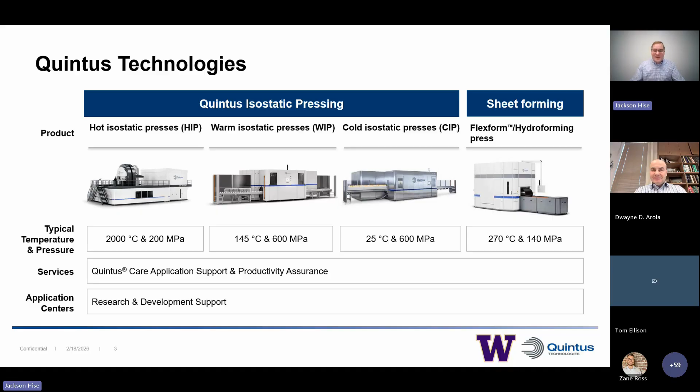Lastly, and I won't talk about it very much, but probably the most interesting thing here at Quintus is cold isostatic pressing, which is used in the food and beverage industry. Here we're taking bottled product, putting it within a cold isostatic press, pressurizing it, and actually disrupting the cell membrane so that bad bacteria cannot reproduce. I have no understanding of what really is going on here, except that if you ever see cold isostatic pressed product, it wasn't some nice hand press - it probably was industrial equipment.

With that background on Quintus, I want to point out Quintus has developed uniform rapid cooling and then uniform rapid quenching. As an equipment manufacturer, we're pushing the field along on what we can do within the HIP system. This leads to what I'll discuss at the end of my part of the presentation on high pressure heat treatment.

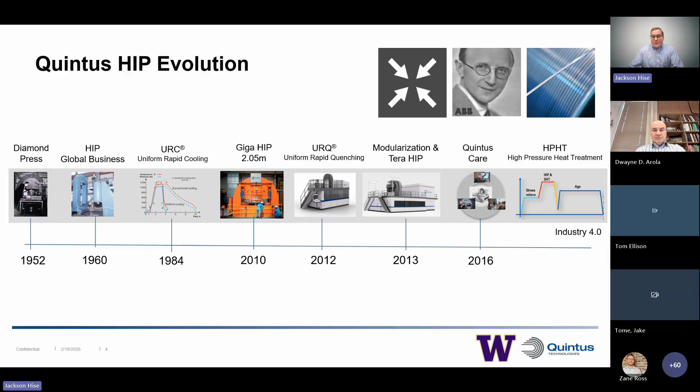So of the products Quintus builds, we have first our R&D and small production units, but this scales to our mid-sized and large production units. The value of this is that we can reproduce anything in a small system that we can do in a large system. Specifically, if you're interested in hipping material, what may fit into a small system can also undergo the same performance parameters in our medium and large size units. And so if you want to hip with the build plate, say, Quintus has products that can accommodate that.

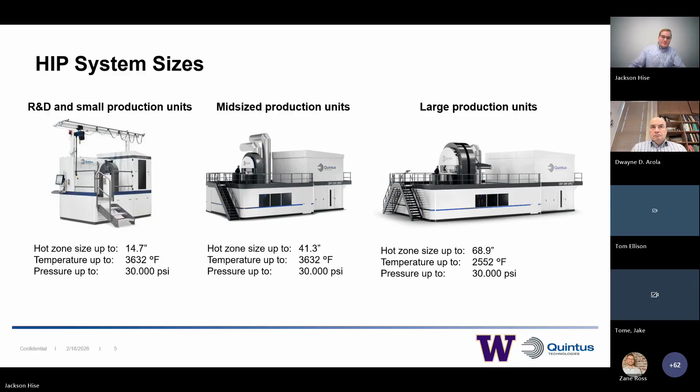Looking quickly at the fundamentals of HIP, if you're unfamiliar, hipping revolves around applying temperature and pressure. Our temperatures go up to 2000 degrees Celsius, but this is really material dependent - we're looking at only about 80% of the material solidus temperature. We're also applying pressures up to 200 MPa, and the first and foremost use of HIP is to densify solids. We see that in traditional cast variants, hipping has been used on mission critical components for many decades.

Here we're applying our temperature and pressure around our part, and given that there's a gas-tight surface, we're able to decrease that porosity and fully densify our material.

We also see a growing interest in the consolidation of powder, where we create a can, a near net shaped can to the component we want to create. Then we fill it with powder, pulling a vacuum on this and then placing it within the hip. We can get a single uniform piece of material.

This is significant because it rivals traditional forging, except that the cycle time, the process time, the manufacturing time is significantly decreased compared to those forging operations.

If we want to think about just the quick material science, I know Dwayne will get into more of this. Densification mechanisms first go through mechanical deformation, where we have the defects collapsing because of this applied pressure. And then over time, over our hold, we have creep and diffusion, where we're seeing that these collapsed defects are bonding.

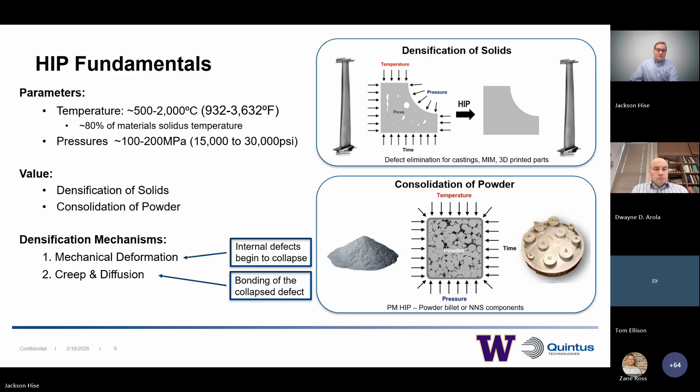I discussed the densification of products. I can discuss the consolidation of powder, but there's other operations that can be formed in the hip, such as diffusion bonding, where we're joining two dissimilar materials together in solid state.

We also have this high pressure heat treatment, which is a development that's only capable with the modern hip system that I will be discussing later, but essentially is doing the heat treatment cycles within the hip after applying this high pressure parameter.

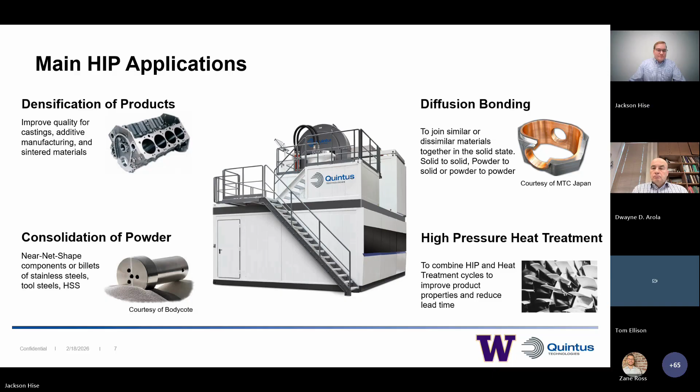So if we want to take a step back and just look at some broad overall advantages of hip material, first and foremost, hipping the material eliminates internal defects. This elimination of stress concentration and crack initiation points lead to superior mechanical property.

If we want to take an extreme example, we can see this machined artificial pore here. Here we machined an 1-inch diameter pore into the component, then welded these two parts together. After we hip, we see that we fully resolved and healed this hole or this pore within the material.

The only true challenge here would just be getting that gas-tight structure in which the applied pressure medium cannot penetrate the material and allow for the pore not to be healed.

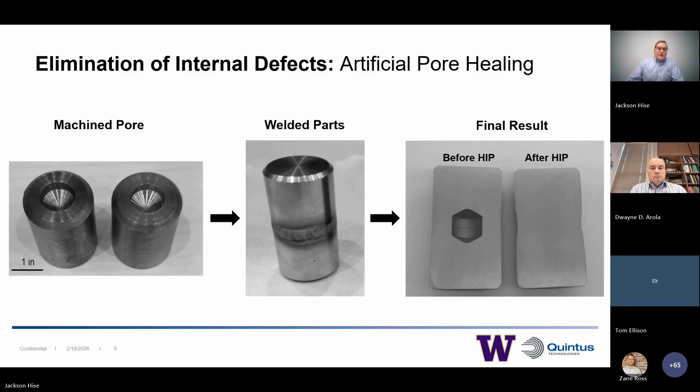If we're looking at additive manufacturing variants, we can see that powder bed fusion, DED, and binder jet all have a reduce or elimination of internal defects after hipping. And this really provides value we'll see here in a second on what it means for printing parameters if we're going to also hip.

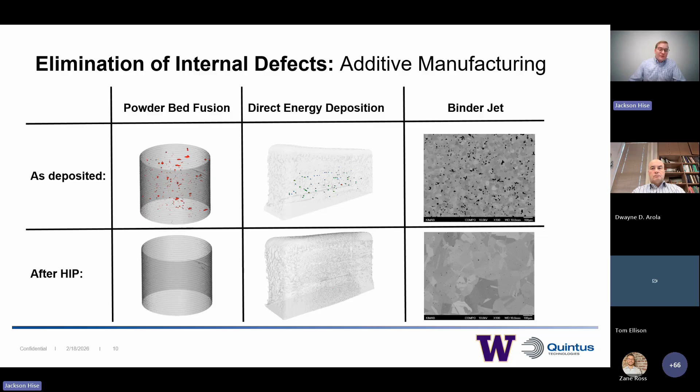So I spoke to the elimination of internal defects, but this really produces superior material properties. We see that hipped materials have dramatically increased fatigue life, up to 100 times, increased ductility and fracture toughness, and better creep properties. If we're thinking of something like GRX 810, a recent ODS alloy that came out of NASA, we see that the hipped version has a creep value 2 times as large as the printed use case.

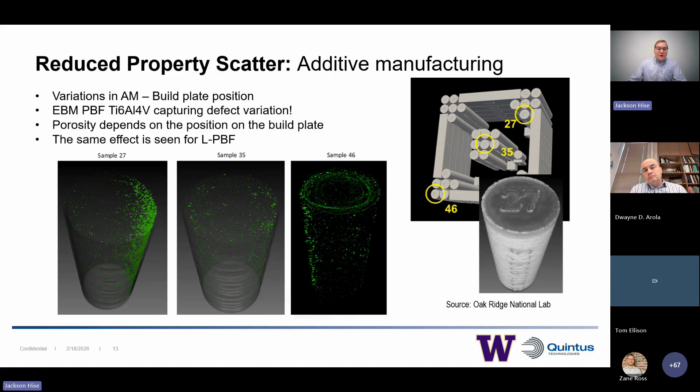We also can think of reduced property scatter. Here we know that there's natural variation of defects between components being built. One example in the additive world is even among the single build plate, variations across the build plate produce different defect locations. So here we can see sample 27, sample 35, and 46, and where these defects are scattered throughout the part. By hipping this, we can resolve these internal defects, providing not only a fully dense sample, but also predictable variation between each and every component.

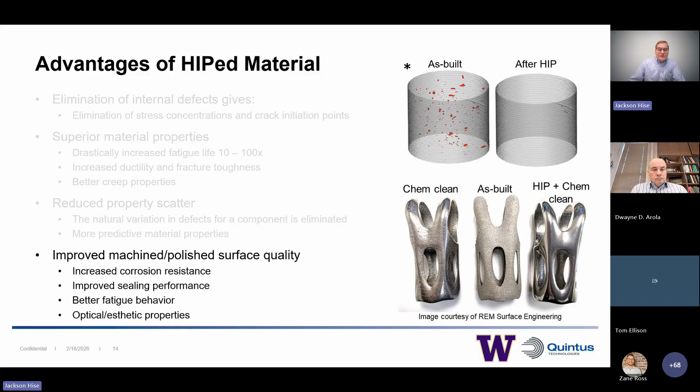Lastly, improved machine polished and surface quality. This, of course, increases corrosion resistance, improves sealing performance, but really goes down to this internal subsurface porosity.

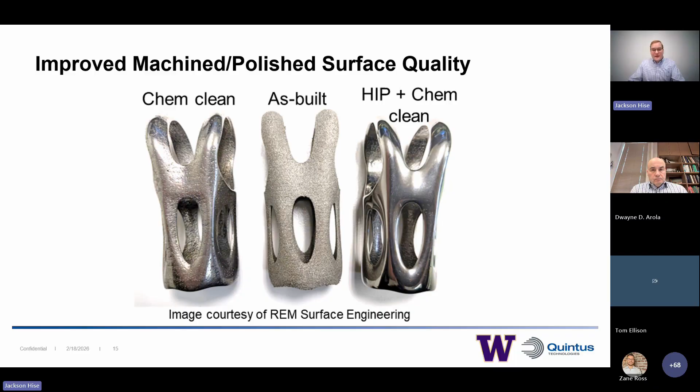Here we have a printed part. If we were just going to chemically clean it, we would see that there's subsurface porosity that's exposed by pulling away material. But if we hip and resolve this porosity, then we can chem clean and get a nice uniform surface, which therefore increases things like corrosion resistance.

Now to discuss modern hip equipment and really some capabilities within the machines that can produce interesting value to a user. First, Quintus hips use a wire-wound pressure vessel. This is where we have a small vessel frame and then wind it with miles and miles of material or of wire. By doing this, we're able to integrate controlled cooling channels, leading to controlled and steered cooling rates.

The alternative to doing this, which Quintus does not do, is a monoblock system which relies on natural cooling to cool down the system in the furnace and contained.

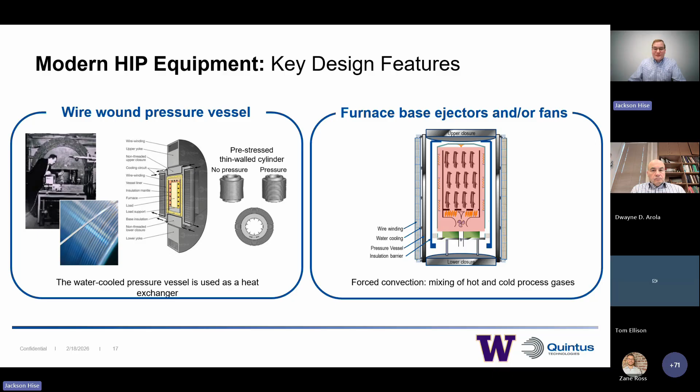We also at Quintus here have forced convection, which uses fans and ejectors at the base of the vessel to circulate gas flow within the system. This leads to the mixing of hot and cold gases, leading to temperature uniformity and temperature control.

Really, the value of these two equipment features is first forced convection heating. Here we have improved temperature uniformity, reduced process cycle time, and lower energy consumption. This is because we can steer the coolant or the heating of the system to the desired rate, hold it, and then cool. And of course, if we can do this quicker and more efficiently, there'll be more cycles we can implement in a given time.

Quintus also has uniform rapid cooling and uniform rapid quenching capabilities. The quenching technique used within a Quintus system has a cooling rate faster than that of an oil quench, slower than that of water quench. So here we can quench and cool the system significantly quicker than conventional cooling, which allows for that reduced process cycle time, but also the opportunity to use high pressure heat treatment that I will discuss here in a minute.

Finally, if anyone has ever dealt with hipping Ti-6-4, you know that the material is prone to oxidation and alpha casing when it undergoes the HIP cycle. Quintus has developed something called Quintus Purus, which is a technique used in the HIP cycle to mitigate and remove that initial moisture presence so it cannot react with the parts. We're seeing the use of this in the medical industry, where the materials coming out of the system are already optically viable for use.

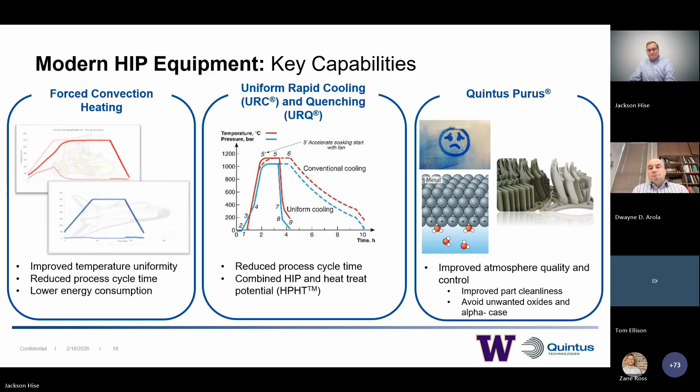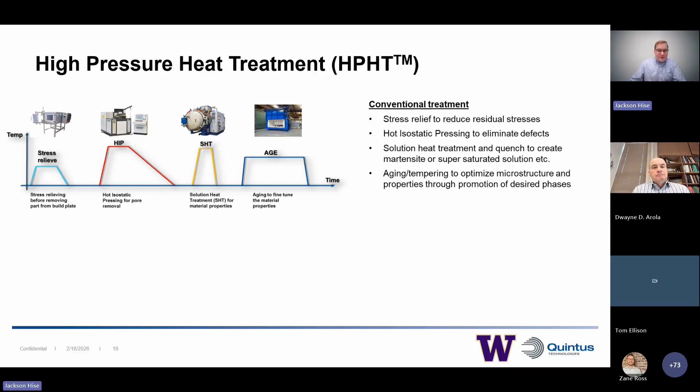I've discussed and mentioned it a couple times, but just to touch base one more time, high pressure heat treatment is really of interest here in these modern Quintus HIP systems. We know that traditional conventional heat treating methods first do a stress relief, then you HIP, then you solution heat treat, and then you age. But given that Quintus HIP is capable of controlled cooling and that uniform rapid quenching, we can do all of this heat treatment within one equipment, one piece of machinery, which is a hot isostatic press.

So here we have our stress relief and HIP, then combined with the solution heat treatment that comes from the quenching capability, as well as an age. This, of course, would reduce the number of process steps, reduce total cycle time, improve process and quality control. And one thing to note is this is being commercially applied today, specifically for aluminum alloys that we'll see here in a minute.

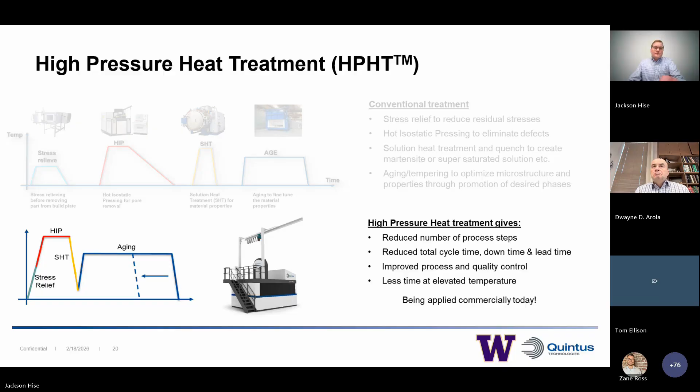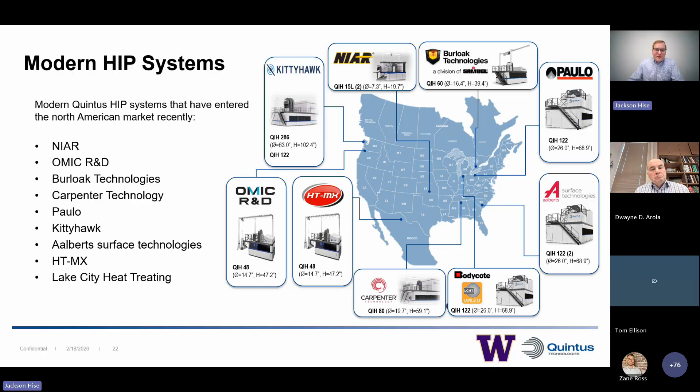So I discussed these modern HIP systems, but want to point out that it's not only theory, but there's multiple places throughout the US that are taking advantage of modern HIP capabilities. Not only are the companies listed here using these modern HIPs, but many other companies that aren't mentioned are taking advantage of the value that comes with a new and optimized system.

I wanted to quickly point out how Quintus has a HIP application center. I'm sure if you're here for Chad, you would recognize Chad in the picture, but Chad and I work within an application center in Columbus, Ohio, whose primary goal is to support the development of HIP processes.

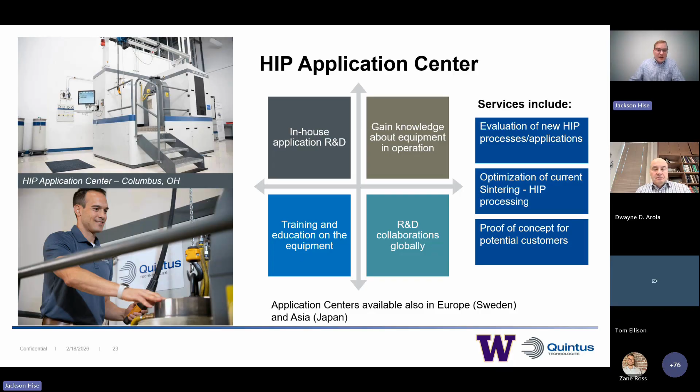So here we evaluate new HIP parameters, we optimize current sintering and HIP processing, and do proof of concept with potential customers. A lot of the work Chad and I put in is in collaboration with OEMs, universities, and national labs, one of which a university collaboration here at Dwayne is going to be highlighted, trying to develop and advance our HIP capabilities.

So just a couple of trends that I'm going to briefly talk to in the additive world before I hand it over to Dwayne to give a case study on this. One trend is printing faster using HIP.

I mentioned in an earlier slide that we require a gas-tight structure to then HIP and densify. So as long as our outer layer of the material is fully dense, then the internal parts can be resolved. This would allow for a print faster using HIP technique where you have a lower energy density, or higher hatch spacing, in order to get the same part at the end. Because even if you have defects due to this higher printing rate, you still HIP and resolve them.

An extreme example of this is the shelled concept, where the structure was printed on 3 sides, fully dense, but then unprinted powder was left contained. Hipping, of course, shrunk the part, but it did create a fully dense structure of material.

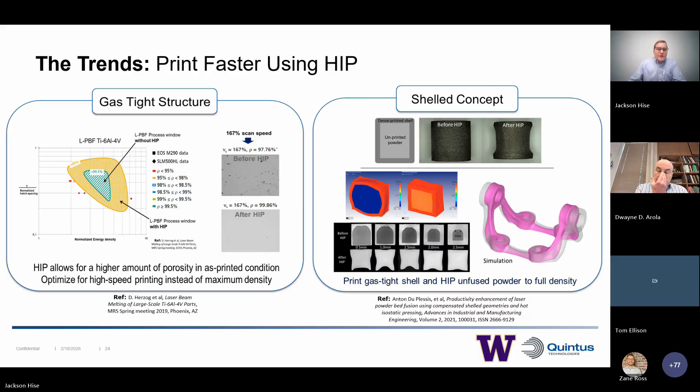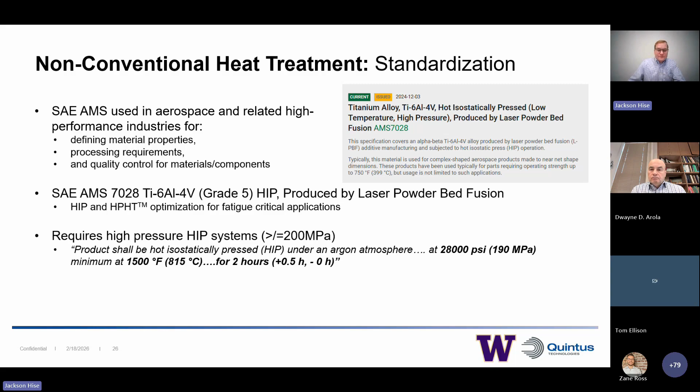I talked about something that's been standardized, such as Ti 6-4, but there's also plenty of work going on to optimize and develop these parameters for other materials. One example is with America Makes, ATI 1700, where we're working with Boeing and ATI RPM Innovations to accelerate the maturation of the nickel-based superalloy ATI 1700. Here at Quintus, we're taking part by utilizing advanced HIP manufacturing strategies in the form of high-pressure heat treatment to optimize the microstructure for our desired outcome.

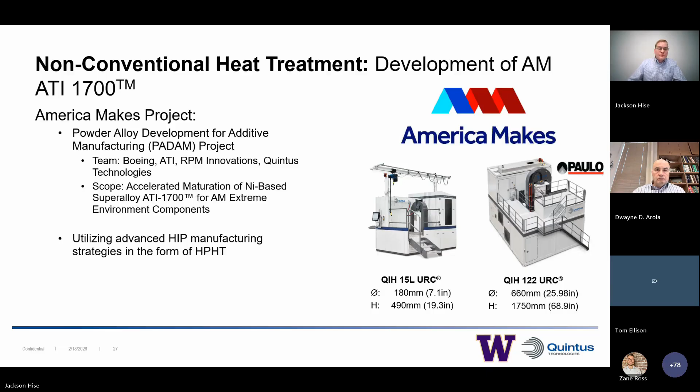One other thing I want to discuss is high-pressure heat treatment post-processing. We know that especially in AM aluminum alloys, there are too many post-process techniques - there's distortion during water quench, and hydrogen blistering that occurs. If we do all of this under a pressure medium, we're able to mitigate and avoid quite a few of these challenges. We can do the stress relief, HIP, and solution treatment all within a Quintus press and do the quench under an argon medium. This alternate approach avoids water quench distortion and also produces acceptable tensile properties.

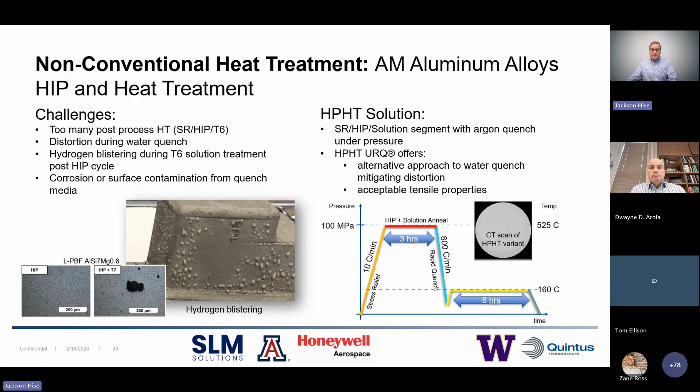As I mentioned earlier, this isn't only in development and being studied, but is actually being applied by some OEMs developing and using this aluminum alloy. So with that, I want to pass the torch off to Dwayne, who can give a more in-depth case study on what is going on with Ti 6-4.

All right, thank you, Jackson. That was great. Good morning, everybody, from the beautiful Pacific Northwest. Happy to be here and talk a little bit about the things we've been doing with respect to application of HIP, but our program is mostly focused on variability.

I want to begin by acknowledging that the case study I'm going to present is part of an ongoing effort supported by the FAA. This is supported through what's called the Advanced Materials in Transport Aircraft Structures Center of Excellence. I'd also like to point out that the work I'll present is the product of contributions from a large number of students engaged in our work.

Our program addresses the challenges faced by companies that have adopted laser powder bed fusion and seek its application for either stress-critical or safety-critical components. Of concern, of course, is the variability in properties exhibited by the metal, for example in a single component, based on where it's located in the build chamber and its orientation.

In the case where we need to produce more than one component, we've got to consider variations that arise from property variation through multiple builds, and understand the degree of that variation with regards to evolution in the machine's condition and process control. Then in the case where we need to recruit additional machines, we're interested in the degree of variation that occurs across those machines - either within our organization, or variability that occurs in machines across organizations or in disparate locations.

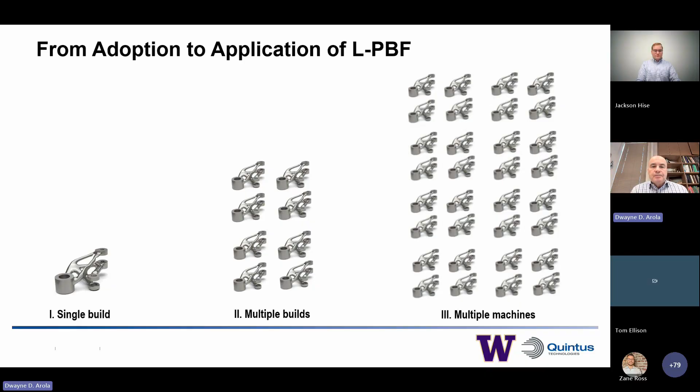So in order to address this, typically what we're doing is referring to categories of process variability. Here I'll refer to an intra-build process variability, which refers to the variation in metal quality and properties within the build volume of a single machine.

Next, we could talk about inter-build variability, which accounts for variation within a single machine but over multiple builds, which could occur from degradation of feedstock due to reuse, or evolution in the machine condition. The last category of variability refers to that which is between machines.

All three of these sources of variability we've got to be able to understand, and of course they all contribute to the reliability of the metal. So it's key for being able to quantify them and then understand root causes.

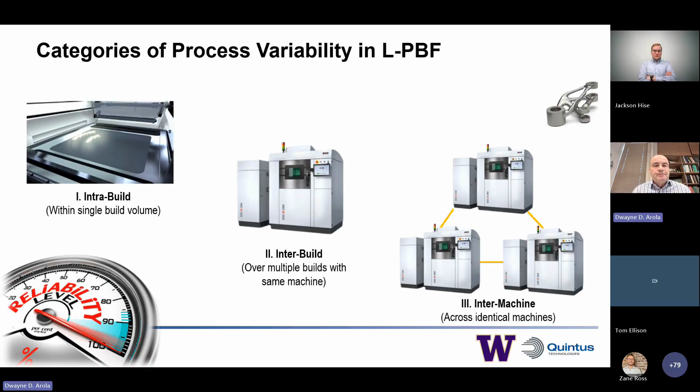So to make sure it's obvious, the objective of our program overall is to characterize that variability in the microstructure and mechanical properties of a grade 5 titanium produced by laser powder bed fusion. The purpose is, of course, to advance applications across aerospace with increased understanding.

The way we're doing this is by utilizing a round robin, led by the University of Washington. We've got a large number of contributing partners, primarily in the aerospace industry. They're conducting prints and are interested in making sure they understand the degree of variability that comes from their machine over the categories I just described.

In this case study, although our program is focused on static, cyclic, and dynamic properties, I'm going to be referring to the stress life or finite life fatigue properties that we've been able to examine.

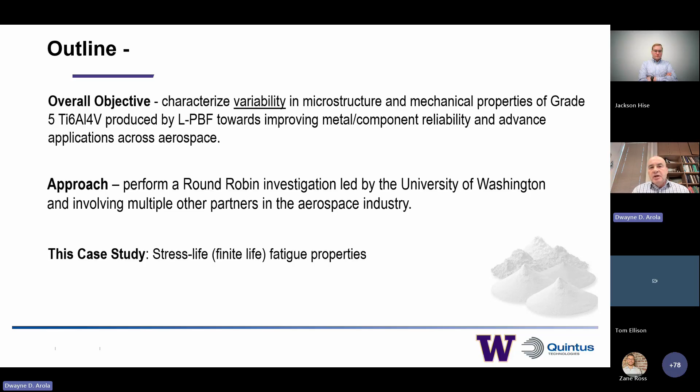And of course what I'll be doing is highlighting what we see with regards to the inclusion of a HIP treatment. So to protect the identity of the participants, I'm going to refer to the round robin partners in a blind format.

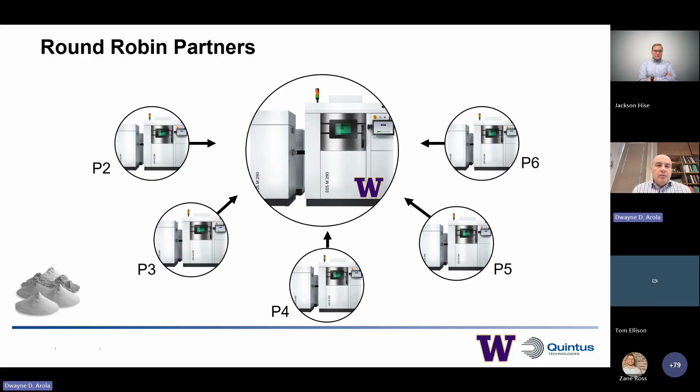What they're doing is providing metal to us with regards to a condition that we've been outlining, which I'm going to refer to in a little bit.

So the program structure involves all the partners engaged in this effort operating an EOS M290. They're all utilizing a single lot of powder, which is a grade 5 titanium. A large lot was purchased at the beginning of our evaluation, and then portions of that volume were dispersed to the individual partners so they could utilize it in their machines.

We all agreed to follow a single process control document. That took a long time to make everyone agree to, of course. All partners are also using the same process parameters, which happen to be the default parameters for producing components from Ti6Al4V. All partners also follow the same build design, which I'll introduce in a little bit.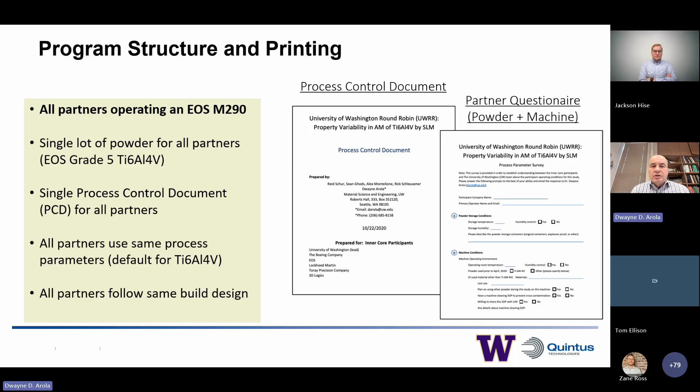I point out here the process control document that everybody worked together to develop, so we could all agree on the framework of the investigation and the nature of the builds, but also so we knew a lot about the individual machines participating in the program. We had a questionnaire that identified the age of the machine, the control software, etc. All details that were important for understanding potential sources of variability.

So to address the intra-build variability, we utilized a build design that discretizes the build envelope into two levels, defined as A and B. And in each of those levels, we have 5 zones.

There's a picture of the build that conforms to that particular discretization on the right. You'll see we have clusters of components in the horizontal and vertical orientation within each of those zones. You also see the labeling from a semi-oblique view here in this picture on the right.

For those of you familiar with the M290, you know the inert gas flow is coming from the back of the machine, so behind zones 1 and 4. And the recoater blade is moving from right to left in this particular configuration across the build plate, which you see at the bottom.

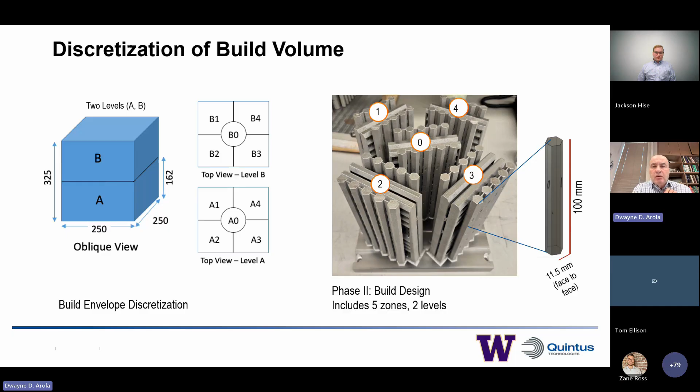And then for each of those hexagonal rods, what we're doing is sectioning out portions within those individual zones, which we then apply post-processing to.

Each of the partners involved in the program performs their builds and sends that metal to the University of Washington. Post-processing involves potentially a heat treatment process at the university, utilizing an argon environment for a low temperature anneal. We'd also be doing support removal, net shape machining, and recruiting a solution partner to do the longitudinal grinding required for the fatigue studies.

Next we're evaluating porosity distribution within the metal, within each of the zones produced, for each of the partners. After understanding microstructure, we move on to fatigue, cyclic loading. Then, after we have components that fail, we evaluate fracture surface morphology, identifying root cause or the origin. That's done 100% for all our failed components.

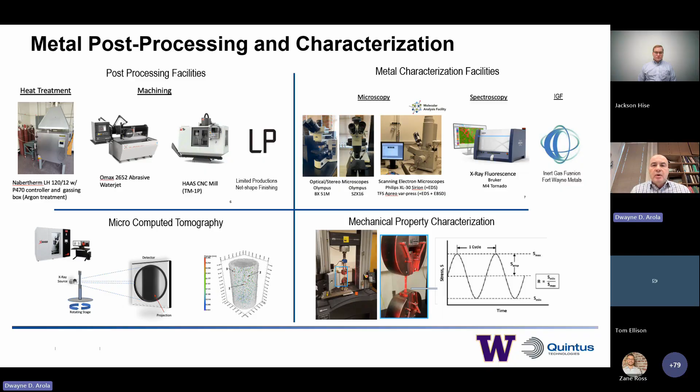We'll also evaluate microstructure, detail of grain structure, look at chemistry, and utilize portions of the powder to examine the chemistry of that particular lot of powder within that individual build for the partner.

Just to make sure I point out clearly, our program involves two different forms of heat treatment. One was a stress relief treatment, conducted at 745 degrees Celsius for 2 hours. Another portion of that lot of metal produced by the partner was subjected to hot isostatic pressing. We could compare properties from stress relief versus hot isostatic pressing, and understand how that contributes to variability.

The HIP process was conducted, as Jackson pointed out, according to the AMS 7028 spec, which is this low temperature, high pressure process. What I'm showing you here is an example of a portion of results from micro CT.

I'm showing you a quarter section of the gauge section of one of our fatigue specimens. You're looking at the highlighted portion in blue, looking down the axis of the gauge section, comparing the stress relief condition and the HIP treatment. What you're seeing is the distribution of pores within that microstructure.

On the left you see the specks of blue and green. Looks like a large number of them, but that's because we're integrating those pores throughout that particular 30 millimeter length along the gauge section. But the important point is to compare that to what you see in the HIP condition. You can see this is all gray, with no evidence of pores within this microstructure.

We were amazed when we saw this at first. We couldn't believe it. I'll show you the other evidence that comes from looking at the fracture surfaces, so I won't be showing any more micro CT results. The reason is because on the right-hand side, there's nothing really to take a look at that gives us an indication of what's contributing to the performance of the metal.

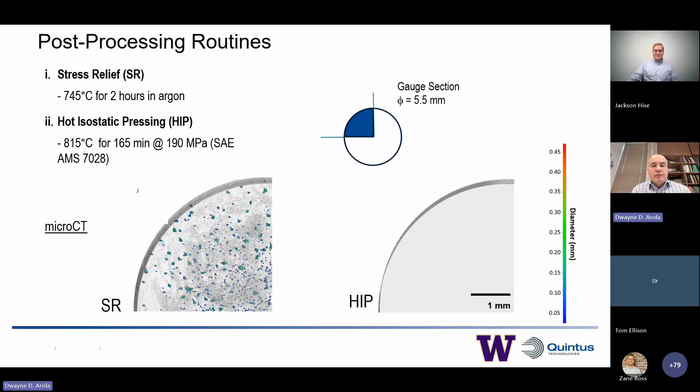Just to make sure I'm complete about what takes place as a function of those two heat treatments, again, it's either a stress relief conducted in argon or the HIP treatment. We start with, on the left-hand side, the as-built condition. This is our standard Widmanstätten microstructure of acicular grains, alpha and beta laths.

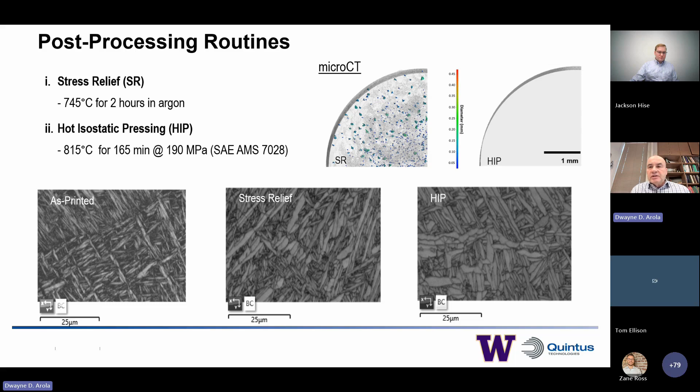The powder that we're utilizing in the builds for our fatigue program is coming from that lot of powder for each of the partners. They built a series of builds for evaluating static properties, and then that powder was used, topped off to replace that which is consumed in the previous build, and each of the partners built 4 of those builds that I showed you outlined for the fatigue program.

So you're looking at a slightly different oblique view here. Each one of those builds rendered a group of almost 200 specimens in the horizontal and vertical orientations.

That was sent to the University of Washington along with a powder sample, so we could track the powder chemistry and introduction of contaminants if it was relevant. Each partner built nearly a little bit over 700 total specimens.

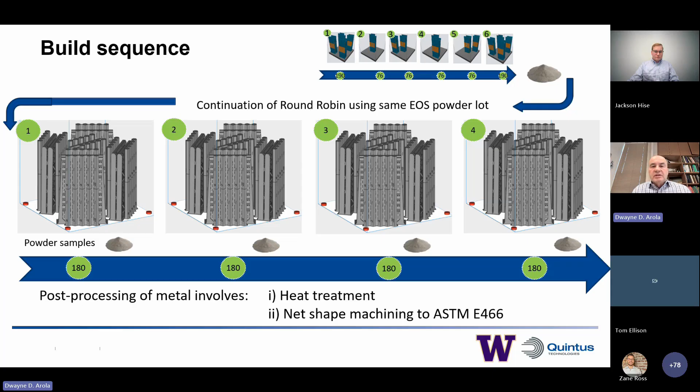After receipt, again I talked about the heat treatment and, of course, the net shape processing, which was conducted in order to be able to meet the standard, which is defined by E466.

So just for those of you who are fatigue individuals, we performed all of our fatigue testing according to E466, that's cyclic axial loading to failure. We performed that in load control with a constant amplitude fatigue curve with a max stress of 850 megapascal and a stress ratio of 0.1.

We were targeting an average life of approximately 5 times 10 to the 5th cycles so that we could have manageable fatigue life for all the fatigue samples developed by all the partners, and the cyclic loading frequency was 10 hertz. All right, so now we're ready to get into the gravy, or the good stuff.

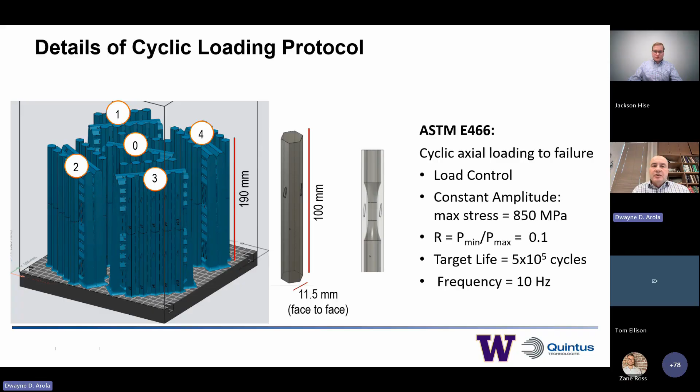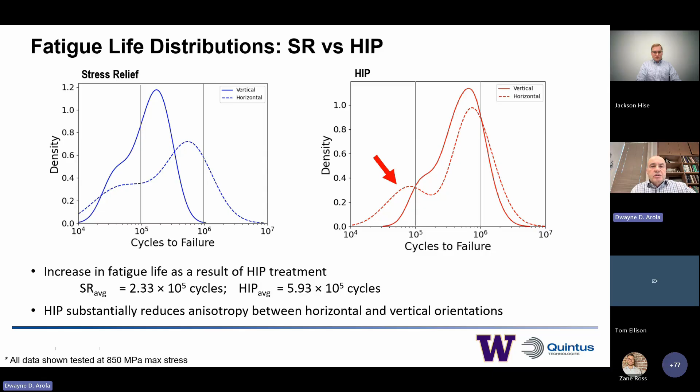If we break this down now into individual partner contributions, but focus just on the vertical orientation response, you can see that in the stress relief condition we see a relatively broad distribution of the actual fatigue lives. Then on the right, at least from what we've been able to develop so far, the distributions agree quite well.

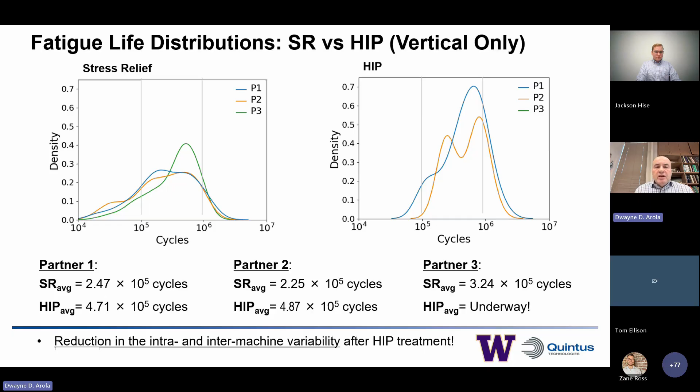You see a narrowing overall in the fatigue lifespan, so we get a reduction in the intra-build variability. And what we're seeing so far comparing results of partners P1, P2, and P3, which is almost finished, is that we're also getting a reduction in the degree of inter-machine variability after HIP treatment. So we're very happy to see that.

We'd like to, many times, looking at fatigue responses, examine the statistical distribution in the data. So here I'm plotting Weibull distributions for fatigue life responses, the vertical orientation, from the 3 partners I represented earlier. This is for the stress relief condition, indicating a Weibull modulus and then the scale parameter. This is a 2-parameter Weibull distribution.

So what I'm going to point out here now is the value of doing this is that we could pick out the kinds of defects which contributed to our low life samples, our medium life responses.

These are representative high life responses. At the low and medium life range, you're seeing two examples of void type defects which contributed to failure. Then at the highest end of the fatigue life response, a carbon defect, internal carbon FOD, actually contributed to failure. These might not be unique from things you see yourself.

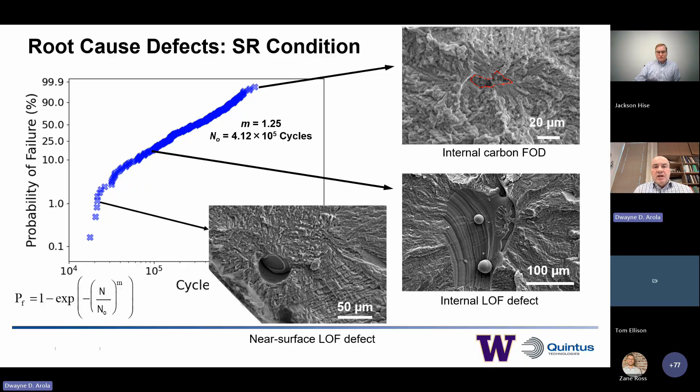But the interesting thing for us, if we do the same now for the HIP treatment—what we saw for the stress relief condition is a very straight line for that Weibull distribution. In this case, for the HIP treatment, we see a little bit of bumps and curves here, which typically means there's more than a couple contributions of factors to the fatigue life distribution.

So if we pick out again contributions to failure, we see at the low life a near-surface brittle type microstructural feature, which I'll elaborate on more in a little bit, and an internal feature which is relatively similar. Then lastly, up at the high end of life, we see an internal carbon FOD type defect.

So the purpose of doing this is to make sure I point out, one, we get an increase in the Weibull modulus, but more importantly, throughout the fatigue life distribution we don't see any contribution of voids to fatigue failure. It's all something that's become revealed or evident as a result of the fact that now all the void type factors are repaired.

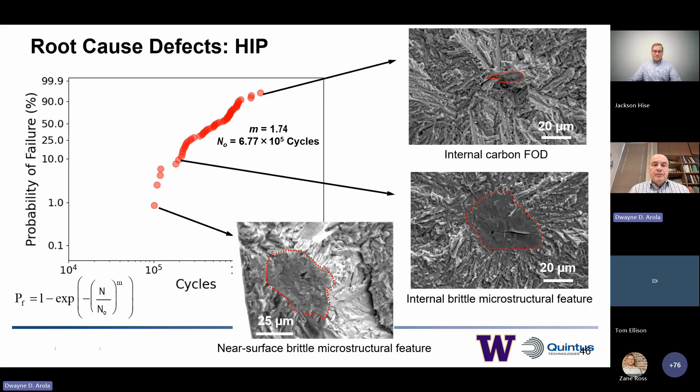So if I compare those two distributions side by side, I gave you a comparison of the average life distribution, which wasn't that impressive. But if you're looking at basis numbers, either an A or B basis number, you see an increase in fatigue life approaching nearly a factor of 5 from the stress relief condition to the HIP condition. So very nice response.

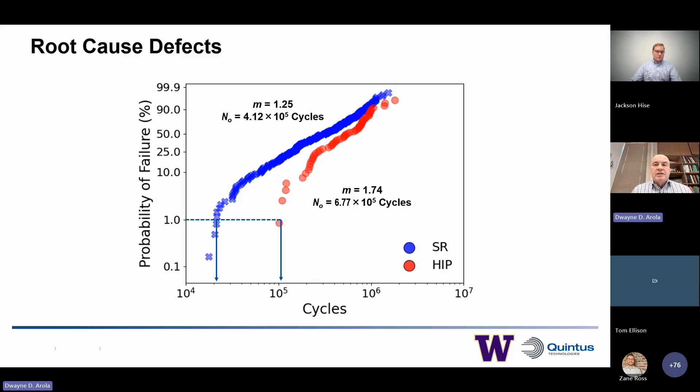What I'd like to do is make sure I point out the major categories of failure origins from fractography. For the stress relief condition, we saw voids, either gas pores or voids, largely consistent circular in shape with an aspect ratio close to 1, or much more lack-of-fusion voids.

Carbon FOD certainly present, and sometimes small bubbles on the boundaries of the individual carbon defects. We saw FOD, foreign object debris—in this case that could be an individual particle, aluminum deficient, higher in carbon. We also saw some foreign contamination. We don't call this FOD yet because you see a region that's aluminum deficient followed by a region that's aluminum rich, and you don't see a discrete particle boundary—you see an integration of that particular material with the surrounding titanium 6Al4V matrix.

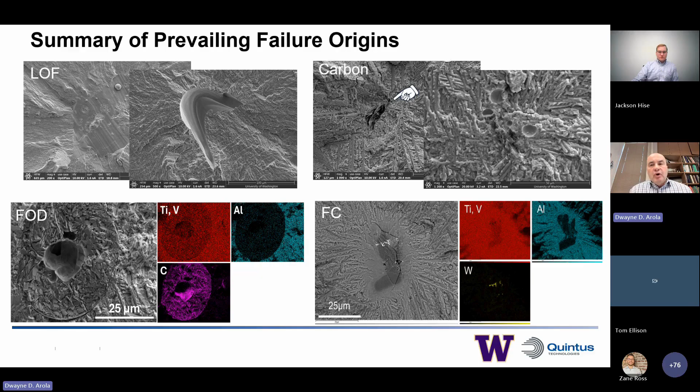So I'd like to point out average defect size, understanding those categories. Here we're using pie charts to represent those four categories. I'm going to break out the voids for the stress relief condition into 2, showing the percentage of lack of fusion in the average Murakami dimension of that defect, then gas pores, and then 3 remaining categories: foreign contaminants, foreign object debris, and corresponding carbon defects. You can see that the voids contribute almost 50% to the total number of defects which contributed to fatigue failure.

Now if I look on the right, the same pie chart distribution for the HIP condition, you see again the lack of fusion and all the pores are gone—no contribution in that space. You also see our 3 remaining categories: foreign contaminants, foreign object debris, and carbon.

But the thing I'd like to point out, which was really surprising to us, is that as evidenced on the fracture surface in terms of the Murakami dimension, we actually saw a decrease in the effective diameter of these defects—about a 20 to 25% decrease in the average defect size from the stress relief condition to the HIP condition. So we're still investigating what's contributed to that, what's actually the primary factor reducing the size of these anomalies contributing to fatigue response.

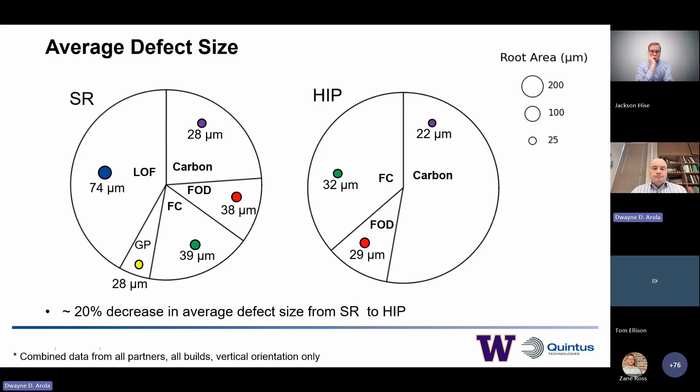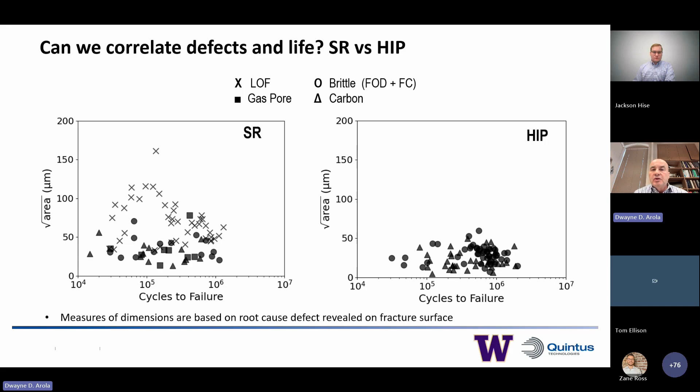In the HIP treatment condition, we don't see a trend at all. The square root of area dimension here is largely less than about 50 micrometers, so reduction overall in size, and no trend. This is not unexpected—a trend between these types of defects depends potentially on location, but also the mechanisms responsible for the percolation of these defects into a well-defined flaw that results in failure. It's scary because we take away the lack of fusion, which were the easiest things to see in a quality control evaluation, and we're left with things that are much more difficult to see. So it's important to understand their source and how they're contributing to failures.

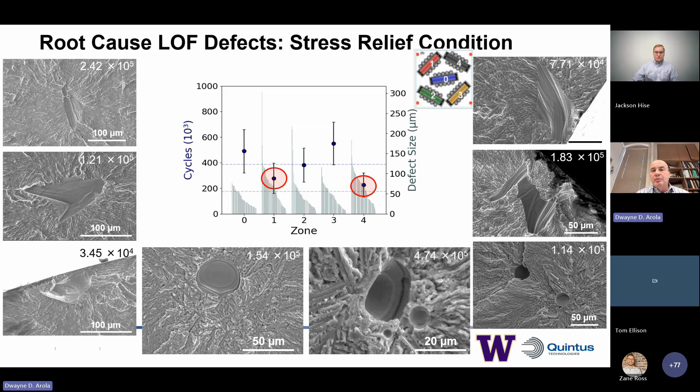What's it caused by? If we superpose defect size within those particular zones, we find larger lack of fusion defects present in zones 1 and 4 relative to 2 and 3. Examples are shown around the periphery—just some examples of the individual lives you see for those lack of fusion voids.

If we do the same thing for the HIP condition, we see first that the average life has increased substantially, though this is again just distinguished in terms of an average. We also see there's no distinct spatial difference across those 5 zones—so that treatment homogenized the metal. Again we show the distribution of representative defects found responsible for initiation of failure, and you can see that none of those are lack of fusion.

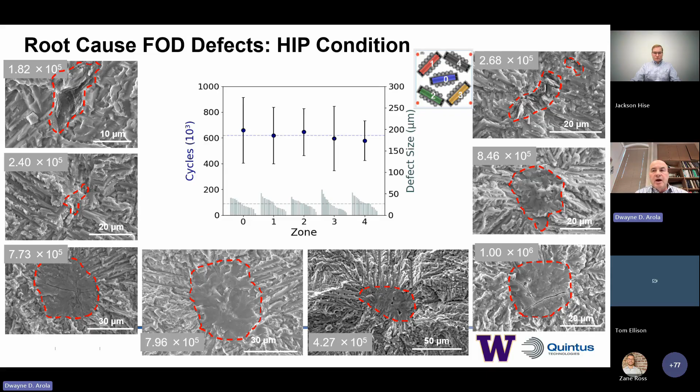We're extremely happy about this, and it's actually increased our efforts to try to understand these major sources and how they propagate into mainstream production.

To summarize, we found that the HIP treatment performed according to AMS 7028 resulted in a significant increase in the fatigue life of our grade 5 titanium, both in the horizontal and vertical orientation build components. The largest benefit was in the vertical orientation because it was able to heal those lack of fusion void type defects. After the HIP treatment, the finite life fatigue responses of the vertical and horizontal orientations became not significantly different, which was fantastic. The root cause defects in the HIP condition were FOD consisting largely of carbon, silicon, tungsten, and some other small traces of contaminants we don't have time to talk about here. But none of the failures in the HIP condition were attributed to lack of fusion voids.

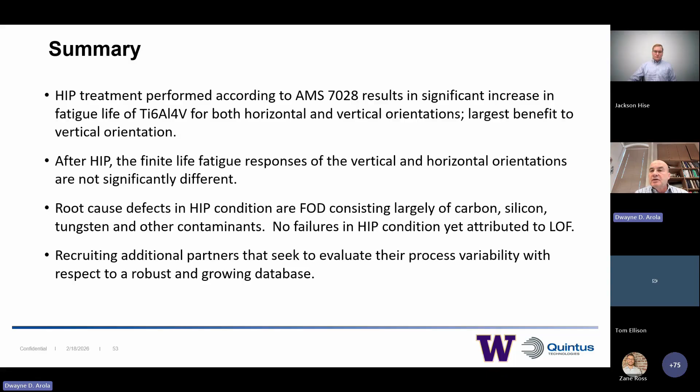Jackson, thank you very much. I think I ran a little bit over, so thank you for being patient with me. No, it was great.